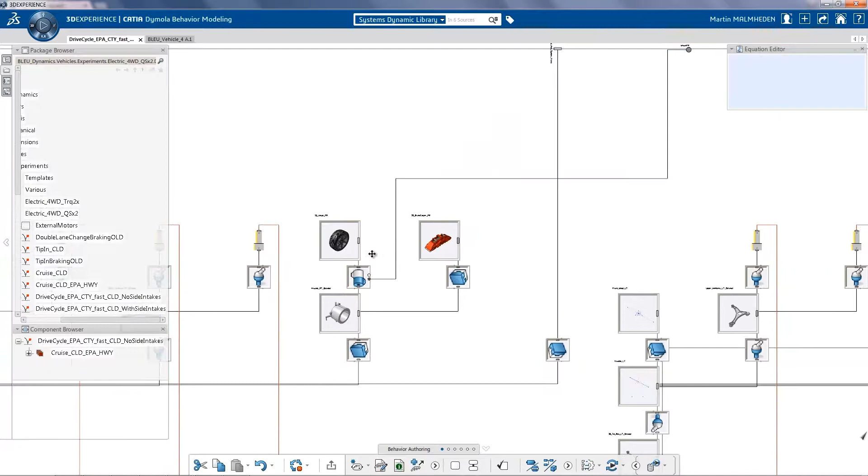Thermal evaluation. In order to assess driving performance, energy consumption, as well as thermal management of the car, the system engineer uses CATIA Dymola Behavior Modeling app. The vehicle behavioral model is structured with all components such as mechanical suspensions up to the very detail of the joints and 3D parts. Not only the mechanical, but the electrical, the electronic, hydraulic or thermal and control characteristics and components can be modeled with Modelica language.

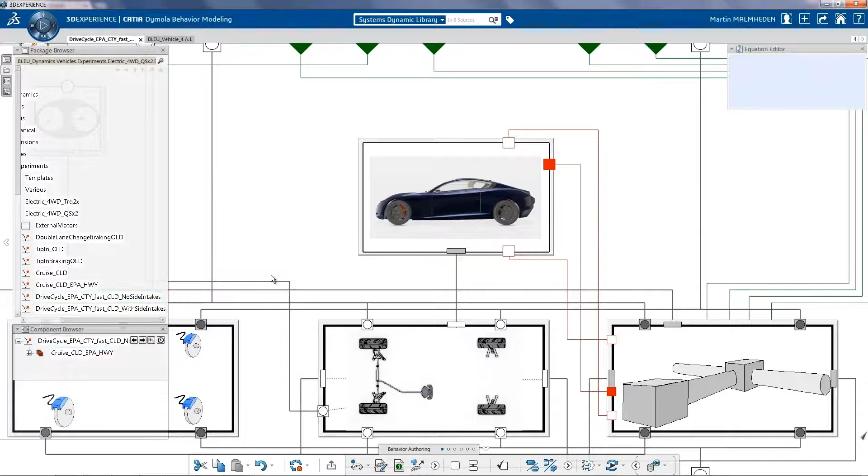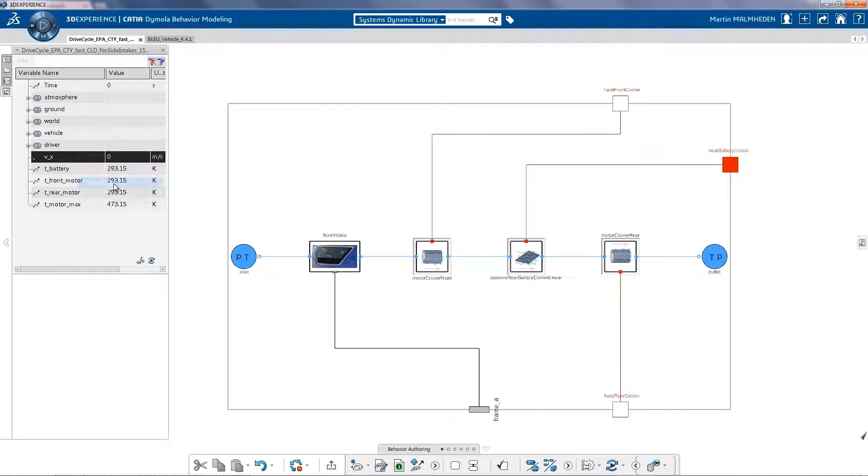Let's have a look at the electrical motors on the driveline. Here in the sport car, we have developed two electrical motors, one for the front and one for the rear. Not only has the electrical been modeled, but also the thermal aspects of the vehicle. Here we can see that we can get air from the front to cool down the front motor, the battery, and then the rear motor in a single stream of liquid cooling.

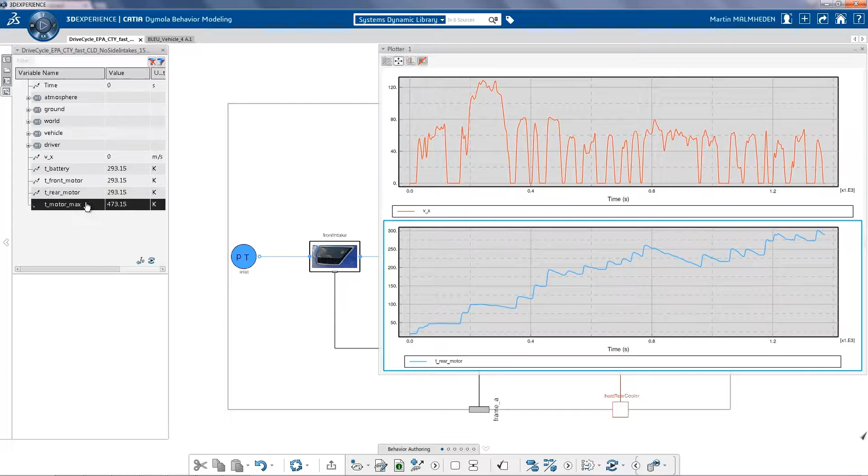If we perform a sport drive cycle, we can then really assess what are the temperatures in the different components, as well as the driving performance. Here we can see at the rear of the car that the rear motor is getting too hot towards its specifications.

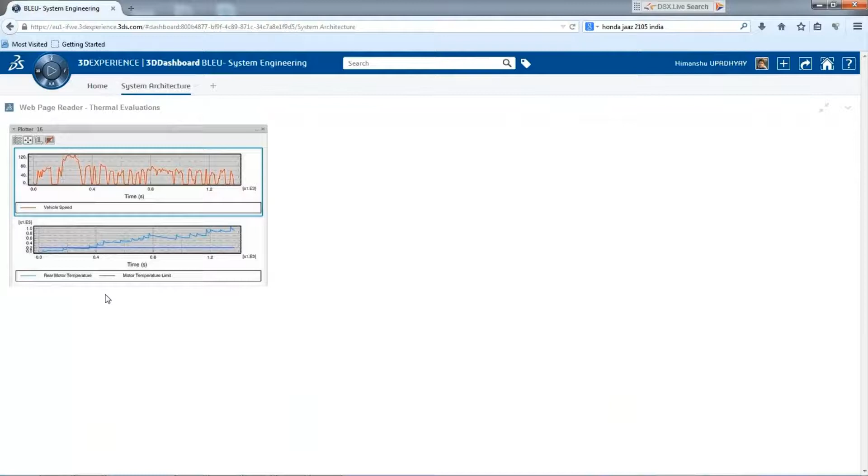New requirement. Brainstorming between systems engineers, designers, and mechanical engineers is managed through an innovation pipeline. To solve the heat issues in the high-speed drive cycle scenario, a solution is proposed. Fresh air will come from side inlets in order to cool down the motor with additional cooling equipment.

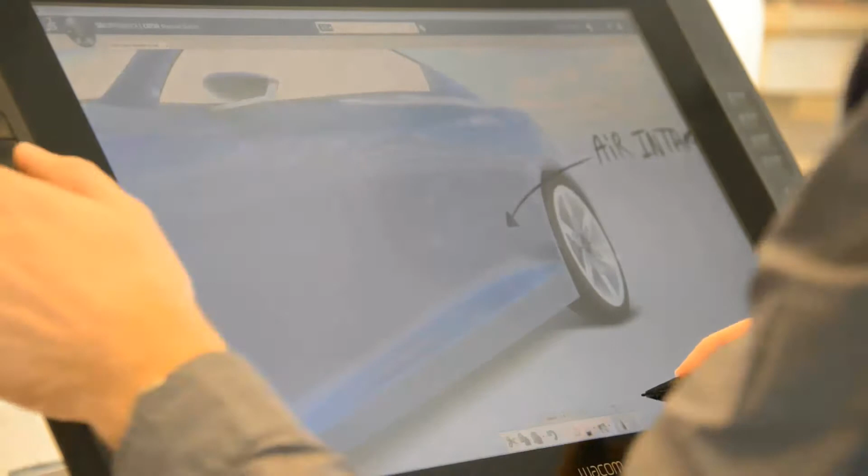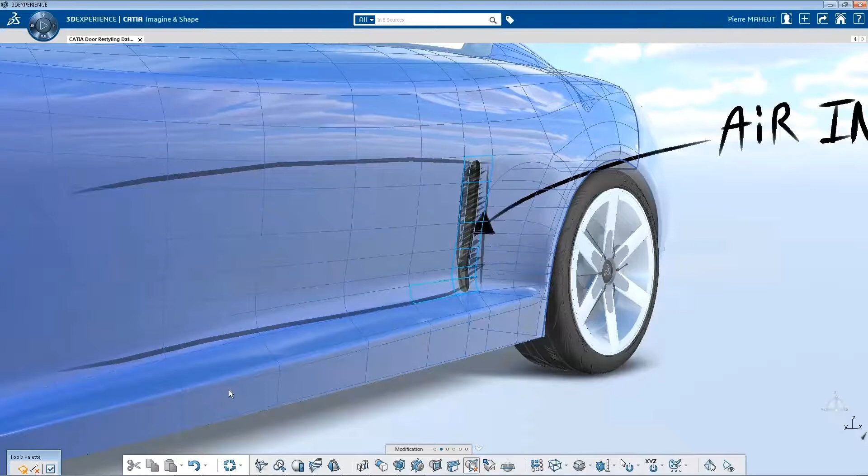Design changes. By using the 3DEXPERIENCE platform, the Creative Design Studio is connected with the rest of the company, and the team is using applications from the dedicated creative designer and Class A modeler roles to create the new design. By using 3D sketching on a tablet, the creative designer can quickly outline a new idea by sketching directly on the existing 3D geometry. Here, for example, he develops the needed air intake.

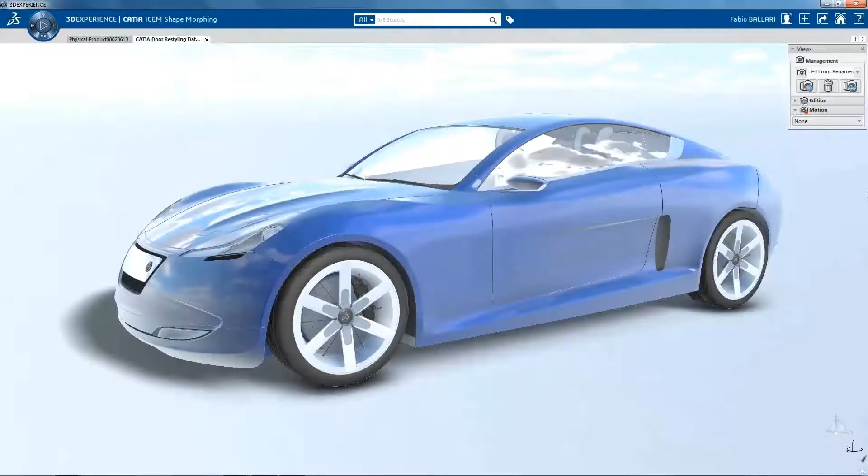Then, by using virtual clay modeling with subdivision surface modeling, the designer can quickly define and see the new shape of the design. The same can be done for the door cutting line and associated gaps. First, the designer sketches the design intent directly on the 3D model and then applies an automated gap feature from CATIA ICEM. By replacing the different sketch ideas that update the gap feature line, the designer can then quickly study the different design alternatives for gaps.

Finally, working in a real-time, high-end visual environment with the CATIA Live Rendering app, the design manager can compare the different new design proposals for final design validation.

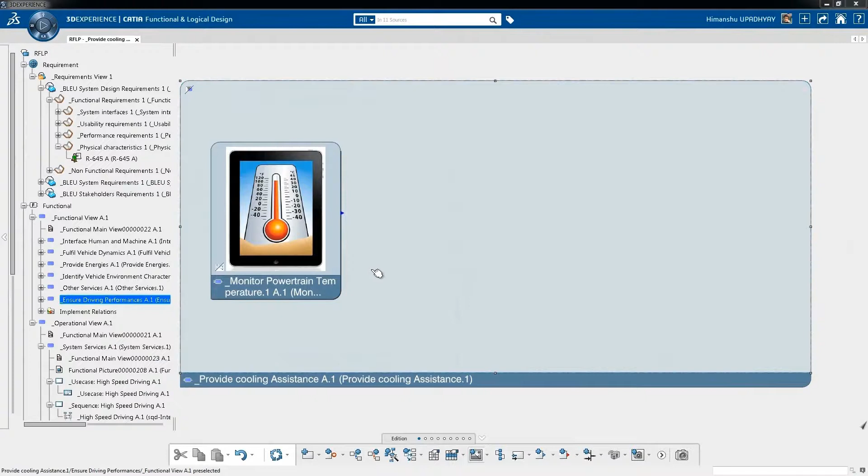Vehicle architecture. In parallel with styling changes, additional technical functionalities for cooling assistance have been added in the functional architecture to satisfy the driving performance needs at high speed. This additional cooling assistance technical function is decomposed into allotted elementary technical functions with parameters, such as the monitoring of temperatures and switching on or off of the cooling system. These technical functions are sequenced in a scenario.

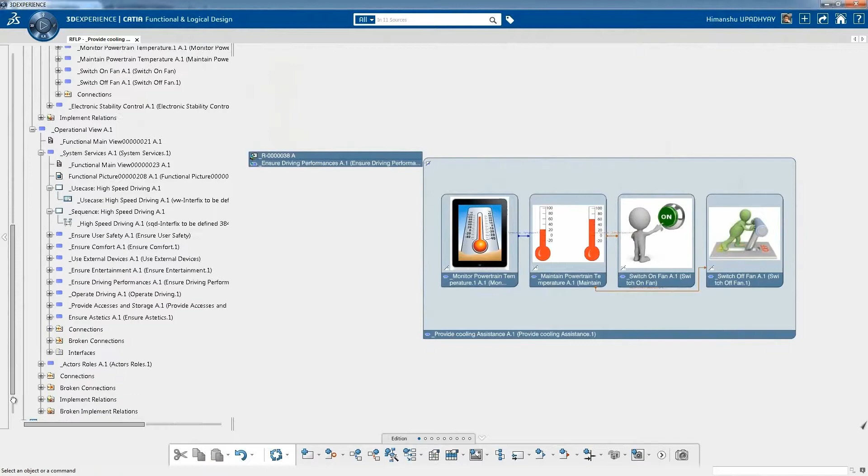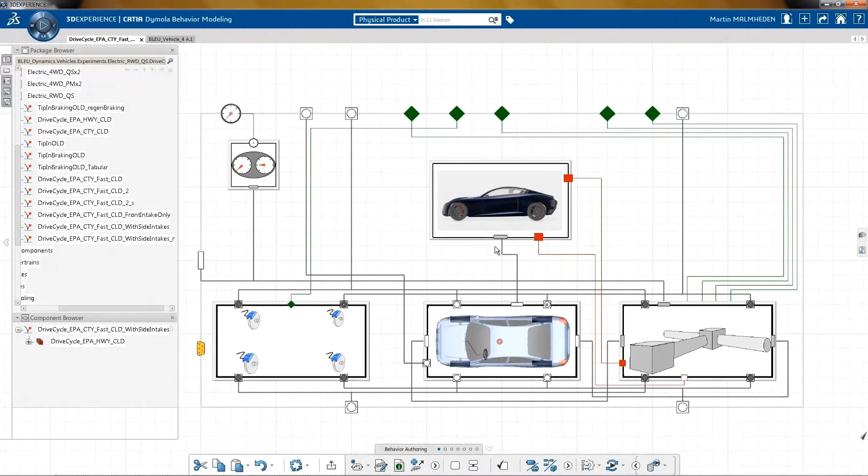A cooling system has been added in the components architecture with allocated technical functions to provide fresh air inflow from the newly introduced side air intakes for cooling down the rear motor. Cooling system. Based on this new system architecture, the thermal models for the cooling system have been developed. Here we can see that the two side intakes directly cool down the rear motor.

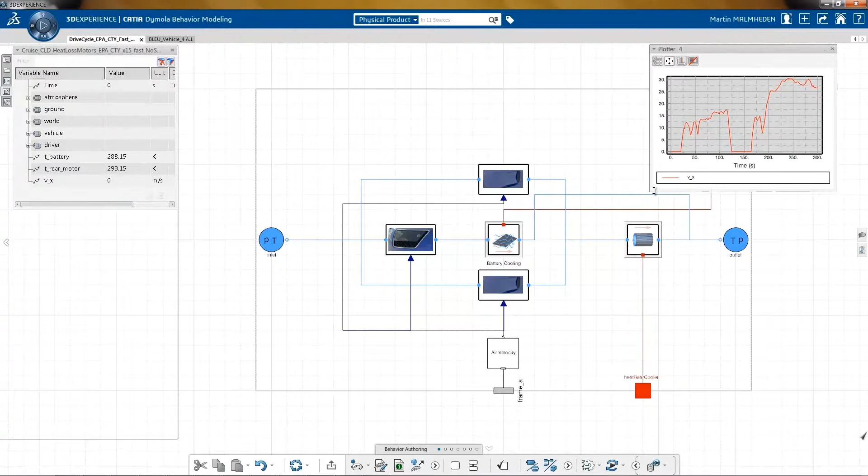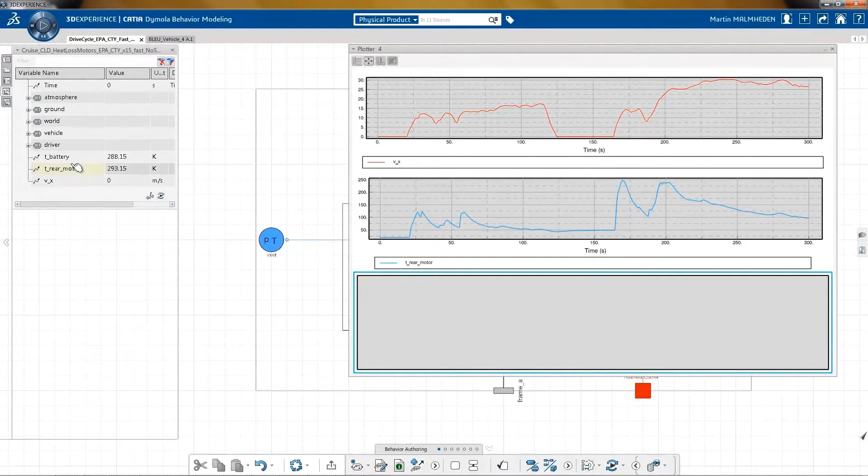Let's have a look at the efficiency of our new design. Based on the speed of the car during the drive cycle, we can quickly assess the temperature of the battery and the rear motor. First, with the previous solution, we can see that the rear motor temperature is getting up to 200 degrees. Now, with the new solution, let's have a look. As you can see, the rear motor is cooled down and 200 degrees are not reached.

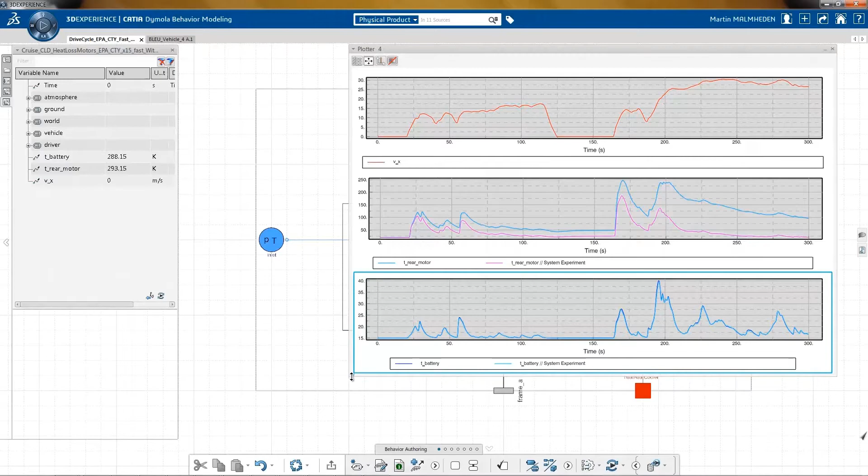Play the experience. This demo has illustrated how impacts from system architects, thermal experts, and designers can be validated together, taking into account their respective requirements, while keeping the global product definition as the unique objective.